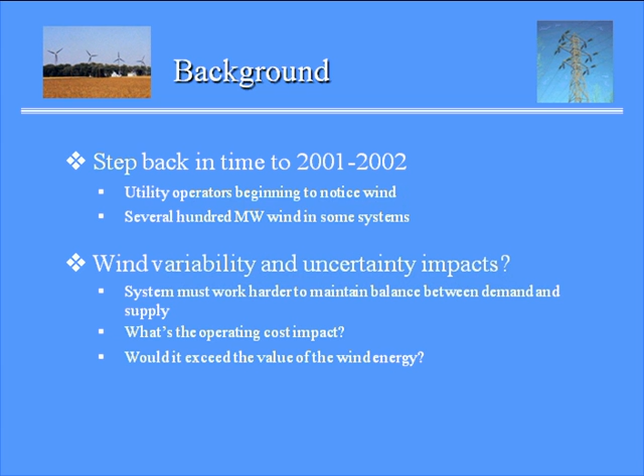Wind wasn't really under their control, it was under the control of Mother Nature. So the operators began to be concerned about the variability and uncertainty of wind and what would be the impacts on the rest of the utility system, because the system has to be kept in balance between demand and generation at all times, and this balancing job becomes harder with a power generation technology like wind that's moving up and down. So there would be an impact on the cost of operating the rest of the power system, and utility operators were getting concerned about that. In fact, there was a fear that the impact on operating costs would actually wipe out the value of the wind energy itself. So that was a serious concern.

in asking this question: what would the integration costs be? So Xcel, Northern States Power, partnered in that era with the Utility Wind Integration Group, and along with a number of other interested folks, carried out a highly credible study of the wind integration costs using models and techniques well respected within the power business. At the time, NSP, Northern States Power, had about 3% of their energy coming from wind, so they studied that, and found that the integration cost was not zero, but it was also not a huge number. It turned out to be about a little under $2 a megawatt hour, or 0.2 cents per kilowatt hour of wind energy, which was well under 10% of the wholesale value of that wind. So UWIG published a report about that, and also EPRI, the Electric Power Research Institute, who was a co-sponsor, also published that report under their cover. So that result was received with a fair degree of credibility.

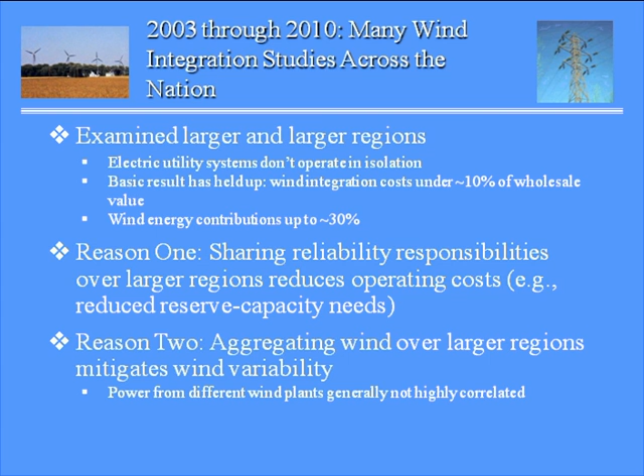A year later, the Xcel people looked at a higher penetration. They looked at 10% penetration, and found a higher integration cost, a little under $5 a megawatt hour, and that was not a surprise. That was to be expected.

Then 2 years later, a study was conducted for the whole state of Minnesota. So instead of just Northern States Power, there were now 4 major utilities, 4 so-called balancing areas considered. And the penetrations of 15 and 25% were looked at, and the remarkable result was that even at 25%, the total integration cost turned out to be less, that $4.41 number, less than the 10% number for Xcel by itself, which was $4.60. And so what you're seeing again is these 2 points that I mentioned on the previous slide, and that is that as you go to larger and larger balancing areas, it becomes easier to integrate the wind and deal with its variability.

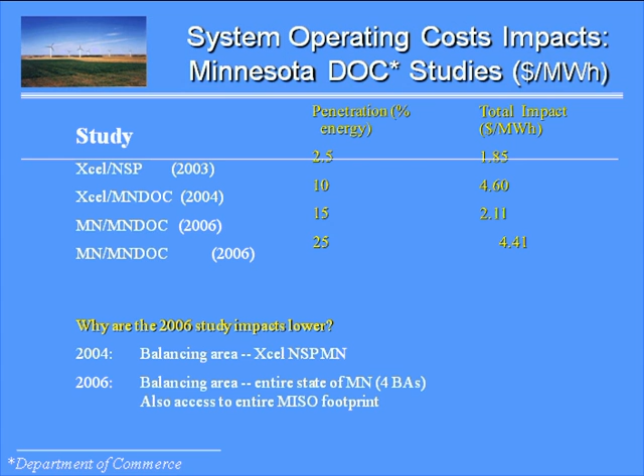So what's happening with Xcel Energy today? They've got 2 major operating areas, a lot of wind in them. One's in Minnesota, one's in Colorado. And in both of those regions, they are now approaching and actually exceeding 10% of retail energy coming from wind. So what's happening is that they're now revising their generation expansion plans, largely in recognition of environmental concerns, the need to go to lower carbon generation, et cetera. And although they previously had planned to add coal plants, they're now changing those plans with the approval of their Public Utility Commission and replacing those plans with a combination of wind and gas.

Now, wind, as I've said, is not an ideal resource in that it is not totally controlled by the utilities, but on the other hand, these folks who operate the systems are learning through experience how to deal with the natural characteristics of wind.

Now, on the other hand, there are a group of folks around the country, a group of skeptics that are tending to fight this trend toward wind growth. And they've made a number of assertions. They will say that wind doesn't work, it just doesn't really displace fossil fuels, and it doesn't really reduce greenhouse gas emissions, and it just costs too much anyway.

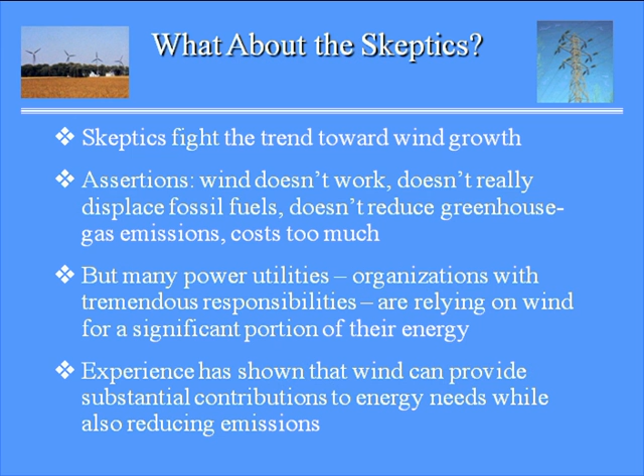Before we turn over to Michael, I wanted to clarify one thing. Many of our listeners may not be in the power industry, people in communities where wind projects are proposed, not used to hearing units expressed in dollars per megawatt hour. Most people are used to looking at their electric bills and thinking of electricity costs in cents per kilowatt hour. So I wanted to connect the dots here: when Ed or Michael talk about numbers like $2 to $4 per megawatt hour, that corresponds to 0.2 to 0.4 cents per kilowatt hour, or less—on the order of a quarter of a cent per kilowatt hour—when electricity rates in the New England area are going to be in the teens of cents per kilowatt hour.

As Ed pointed out, there are a number of valid concerns and questions that the people who operate the electricity systems throughout the country have been asking. What will wind do to the system? How does wind impact reliability? What are the impacts and the costs? And what additional needs does the system have in backup capacity and operating reserves?

And ultimately, does wind power cause the offsetting of fossil fuels and emissions, as wind proponents have claimed, and what can be done to integrate larger amounts of wind?

Michael Milligan is part of the Transmission and Grid Integration Team at the National Renewable Energy Laboratory. Michael has authored more than 120 papers and book chapters and served on numerous technical review committees for integration studies. He is co-lead for the Probabilistic Methods team of the NERC North American Reliability Council Variable Generation Task Force, a member of the Western Electricity Coordinating Council's Variable Generation Subcommittee, the International Energy Agency's Task 25 on large-scale wind integration, and served on the Western Governors Association Clean and Diverse Energy Wind Task Force.

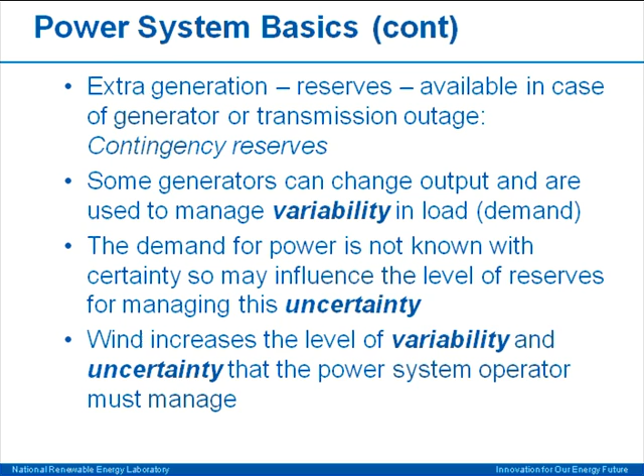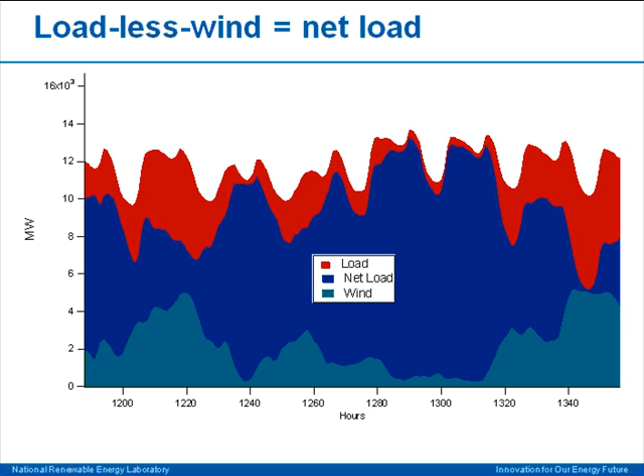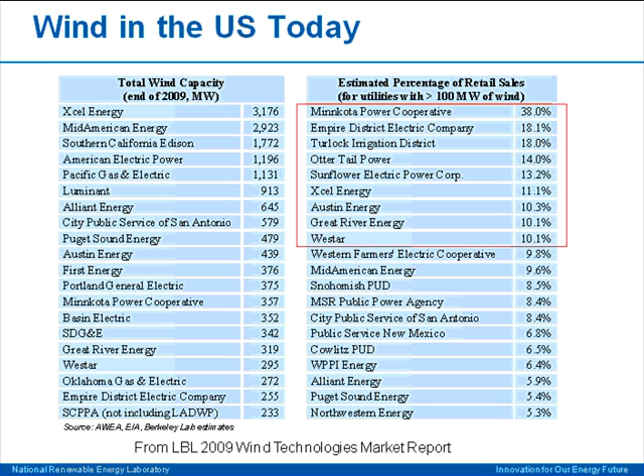Today we have wind in many areas around the United States. I outlined some areas that have more than 10% electricity coming from wind. You see Xcel Energy roughly in the middle, a little below middle at about 11%. This is from the Lawrence Berkeley Laboratory's 2009 Wind Technologies Market Report. It's a very good survey, and I recommend it if you're looking for interesting reading about wind and its impact in the markets.

This is an example of an actual utility. It's not modeled, not simulated - this is an actual week. This utility has an instantaneous penetration of wind of 35% of the peak. If you look carefully at the graph, you'll see the maximum wind output occurring at a time when the load is low. This is not uncommon. It's not what you hope for, but in this case, in the middle of the night, electric demand is fairly low while the wind is pretty high.

This graph shows that challenge. This utility is able to manage it - they have some flexible generation that allows them to manage that wind. Of course, this slide doesn't really address the issue of certainty or uncertainty. You'd certainly like to know when this high wind is coming so you can position the rest of your generation to manage it.

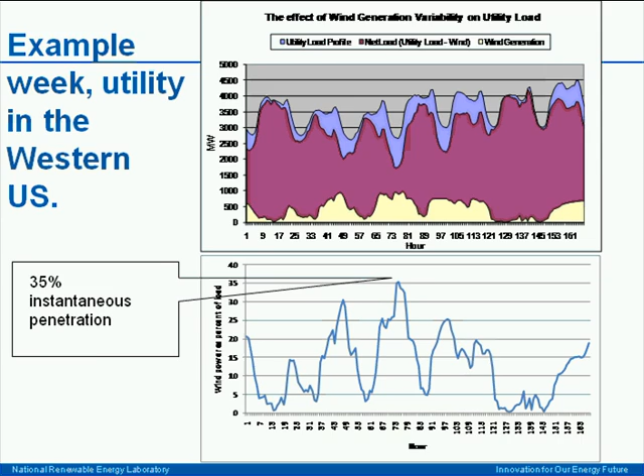So let me talk for a minute about integration studies - what they are and what they look at. These are very detailed power system studies. They involve some combination of simulating the operation of the power system, and Bill will talk a little more about that for the New England study.

What you want to do is represent the power system as accurately as you can, so you get actual data for the performance of the power plants you already have - what type of fuel they use, their operating characteristics, how long it takes to start them up. I mentioned the unit commitment process. For large thermal plants operating with coal as fuel, it takes many hours, and in some cases up to a day or two, to get those units up to operating temperature so you can run them.

So this whole idea of unit commitment is important, and we need to make sure we fold that into the wind integration study. If a plant takes a day or six hours or whatever to start up, we want to make sure the simulation knows about that. So we have lots of detailed data from the existing power system, including transmission loading limits, whatever we have available and appropriate for the study.

What you'd really like to do is utilize actual wind data, but we're trying to study the impact of future wind plants that don't yet exist, so there's no actual data. In lieu of that, we typically utilize data from large-scale numerical weather prediction models used to recreate the weather. Those models are essentially the foundation of weather forecasts in the U.S. and around the world, and they allow you to extract things like wind speed at any time and space you want. I've got another slide I'll show later on how that's done, but essentially we get detailed wind data representing the future wind build-out.

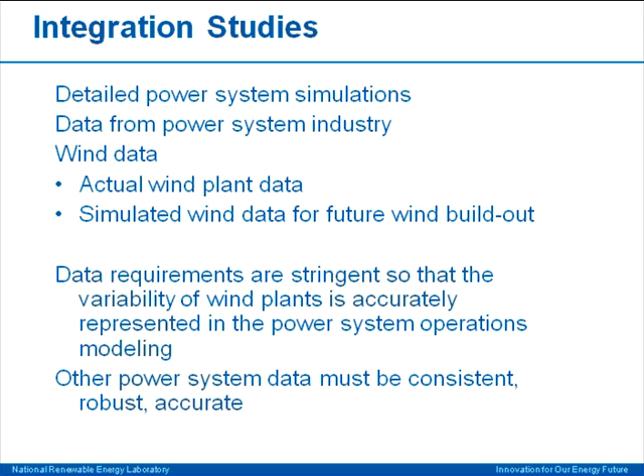This slide is based on our large-scale data set developed for the Western Wind and Solar Integration Study. You can see this on NREL's website. What this shows is that we model the weather around the region of interest, in this case the western part of the United States. Because this is based on a numerical weather prediction model, we can recreate the wind speed at any time and space.

This map shows different capacity factors of wind in different areas. The red blotches represent some very energetic wind resources. As you move toward the cooler colors, these tend to be lower capacity factor wind plants, so their energy yield per unit of capacity is less as the capacity factor goes down.

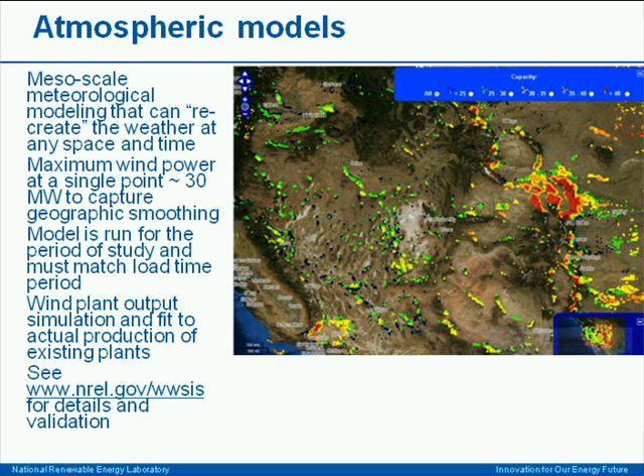For the Western study and also for the Eastern study, we have a large variation in the performance of the wind plants we're simulating. We've got a consistent weather model driving all the wind, so the wind we're feeding into the power production model is a pretty good simulation, and it does take into account the different wind speeds at different times and locations across the footprint.

The integration study results, as Ed alluded to, show that we can integrate wind into power systems reliably and economically. In some cases there may need to be operational changes, and in cases where operational changes would be needed to incorporate large amounts of wind, those changes would actually be beneficial even if there were no wind at all.

Ed mentioned larger balancing areas. We've seen consolidation of balancing areas and reserve sharing groups across the U.S. for decades, and that was driven not by wind, but by the fact that there are many economies of scale and reliability benefits you get from larger operating footprints. Both of the integration studies have a rigorous technical review process.

The technical review committees typically come from various aspects of the power system industry, with folks having various subject matter knowledge. The Utility Wind Integration Group is essentially an industry group trying to better understand the issues behind wind integration, primarily power system focused. I believe all of the independent system operators and regional transmission organizations in the United States are members of UWIG, along with many utilities. If you're interested in following other integration study results, I recommend UWIG.org as a website. Go to the Wind Integration Library, and there's plenty of information on these studies.

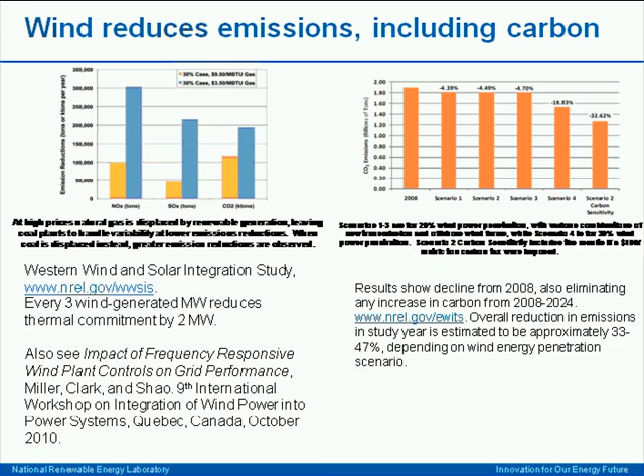The North American Electric Reliability Corporation, the reliability organization for the United States, has a number of working groups looking at wind integration. It's not so much a question of if we can integrate, it's a question of how we do it. That work is ongoing, with a number of reports in process. A couple of reports have been approved by NERC that show some of the things we need to think about as we move towards a higher wind future.

The frequently asked questions I'd like to talk about came from an article I did not choose the title for, Wind Myths Debunked. This was in a recent Power and Energy magazine, a publication of the IEEE Power and Energy Society. We had a number of co-authors, including Ed DeMeo, and folks from literally around the world. Many, like Hannele Holttinen from Finland, who chairs the International Energy Agency Task 25 on large-scale wind integration. We also had various consultants and folks from GE Energy, University College Dublin, and Sweden.

What we did in this article was take a look at questions that we've seen people ask from around the world, and we focused on these and attempted to answer them in as simple a way as we could.

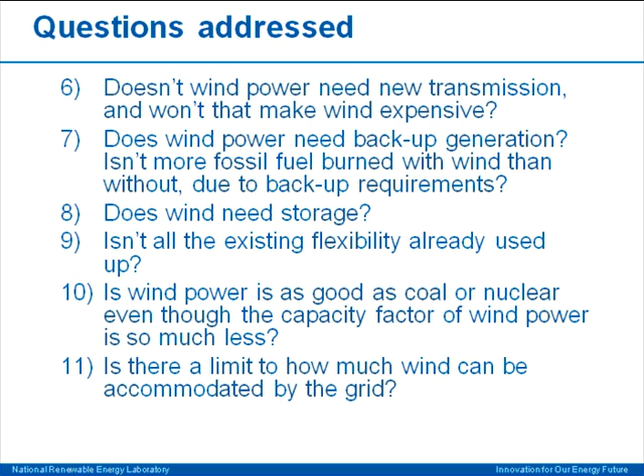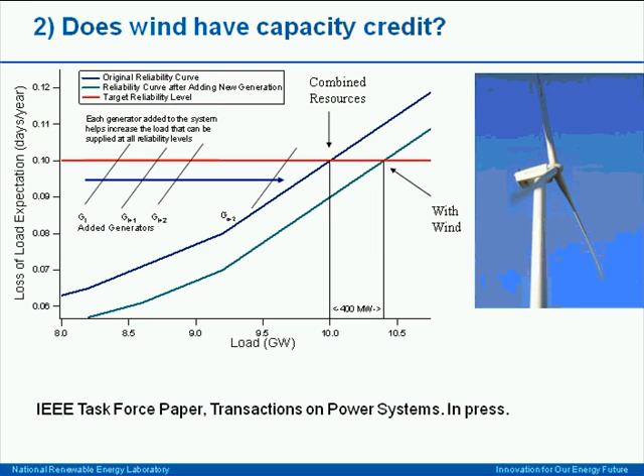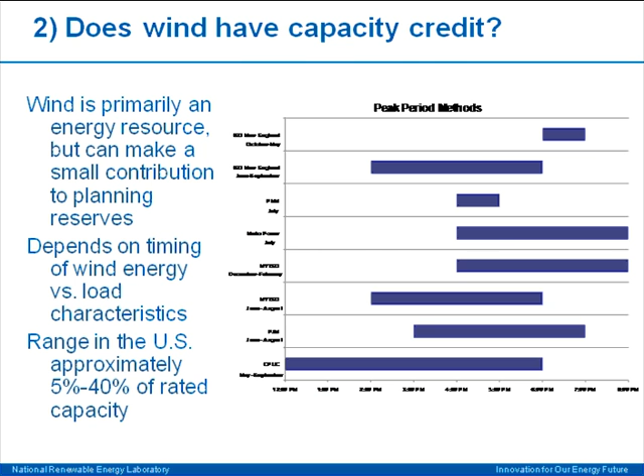I'm going to skip through this slide. This basically just shows that there are a number of entities around the United States that use non-reliability-based metrics. These are essentially approximation methods. If you're interested, I can give you more citations on what this means.

The next slide: how often does the wind stop blowing everywhere at the same time? This is actually an event that occurred in Texas a couple of years ago, February of 2007. What happened was there was a very, very large dust storm that moved through Texas. In the bottom picture, this is actually a satellite image we got from WindLogics, and you see the little yellow highlight that shows the dust. So this is telling us this is a pretty big storm, it was visible from the satellite, you could see the dust swirling around.

What happens is that wind turbines are built and designed so that they protect themselves when the wind is too high. So the wind turbine will shut off, somewhere around 50 miles an hour, but it depends on the wind turbine.

This particular storm moved through Texas, and as you can see in the right-hand upper graph, there was a decline in wind output. In the upper left-hand part of the graph, it's a little hard to make out, but we have traces for many of the wind plants, and in some cases they dropped off pretty quickly.

You can see the red trace where there's about a 170 megawatt decline in wind over a 15-minute period. So that's obviously cause for concern. But in aggregate, when you take a look at all the wind plants across Texas, there's about a 1,500 megawatt drop over a 2-hour period.

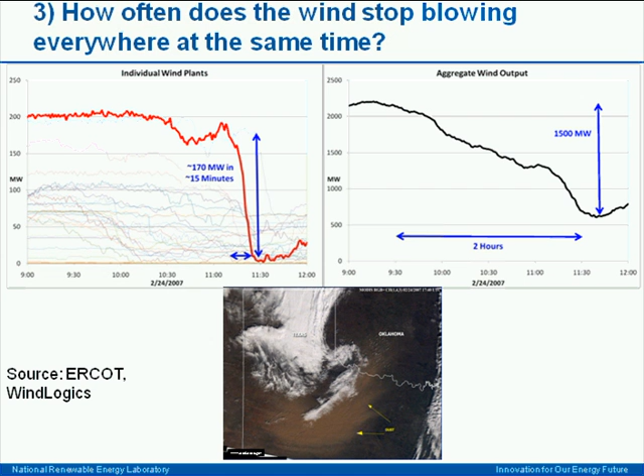And there was another event in Texas that had kind of a similar result.

I'm going to pick up the pace a little bit. I've got a lot of slides to cover, and I know we want to hear from Bill Henson and have some Q&A time.

But kind of the upshot for this slide is that, yes, we can predict wind power. It's harder to predict day ahead than it is hour ahead. But we'll never be able to produce or forecast it perfectly. The relative forecast errors decline for large footprints in the same way that wind variability declines per unit over large footprints.

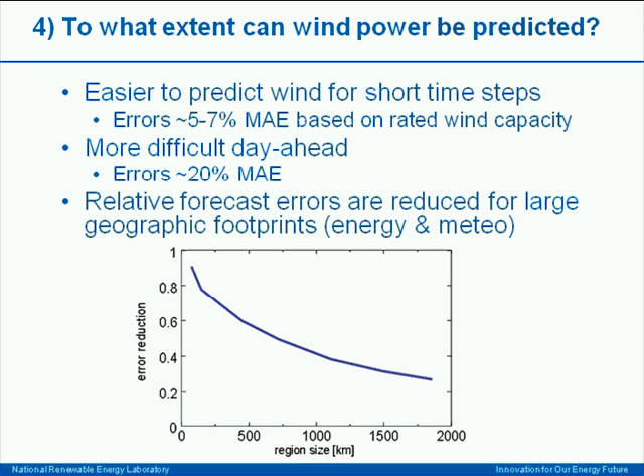Ed talked about some of the integration studies. This is another summary of a few additional integration studies. I caution you, if you're comparing these closely, many of these studies utilize different methods to calculate wind integration cost, and many of them have different penetration rates. But if you take a look at the range of integration costs, it's relatively low.

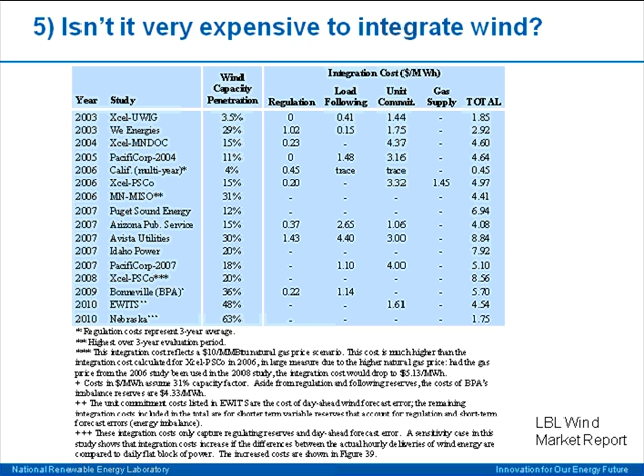If you ask why it costs more to integrate wind, the primary cost really comes from additional operating reserve. Now that doesn't mean you have to go out and build new generation when you put in wind. It means the generation you have needs to be operated differently. It's going to be moving around, ramping, you're going to be turning it down, you've got some efficiency losses, and so there is a cost impact of all that.

When people talk about additional reserves for wind, we're not talking about a constant level of backup that's available 8,760 hours of the year. There's a recognition that sometimes you're not getting any wind energy. If you're not getting any wind energy from your wind turbines, then clearly you don't need to worry about backing up the wind—it's already at zero, and you're running the rest of your generation fleet to meet the load accordingly.

The variability of wind does combine with the variability of load. There's very little correlation, and that's good and bad. It's bad because you'd like perfect correlation, wind going up every time the load goes up, but unfortunately that doesn't happen—wind sometimes goes up when load goes up, and sometimes goes down when load goes up. The good news is that the variabilities combine, so you don't need to back up wind one for one. We don't actually back up any generation in the system one for one because it's too expensive.

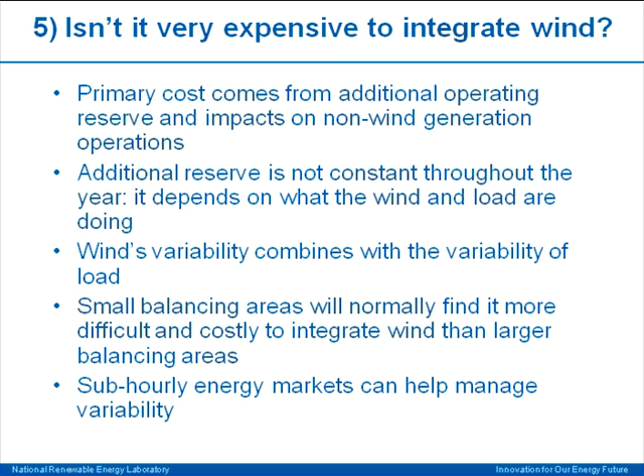We also find that sub-hourly energy markets help tremendously in managing the variability. Now, the sub-hourly energy market does not magically reduce the variability that you have on the system, but what it does is allow you greater access to the flexibility that you do have on the power system. So we see that as a very big factor in integrating wind.

Don't you need new transmission for wind, and doesn't that make wind expensive? Well, you generally need transmission for most new generation sources.

You may need more for wind if you're bringing remote wind to a load center, and certainly transmission does have a cost. Some work by the Midwest Independent System Operator and other regional transmission organizations in the East found a benefit-cost ratio of 1.7 to 1 for transmission that would support a 20% wind energy penetration. Transmission tends to be a pretty low percentage of overall power costs.

So yeah, there's a cost to transmission. I don't want to totally gloss over it, but like anything else, you need to do a detailed cost-benefit analysis to figure out if this particular transmission has value that exceeds its cost. If so, we should build it. If its cost exceeds its value, we should not build it.

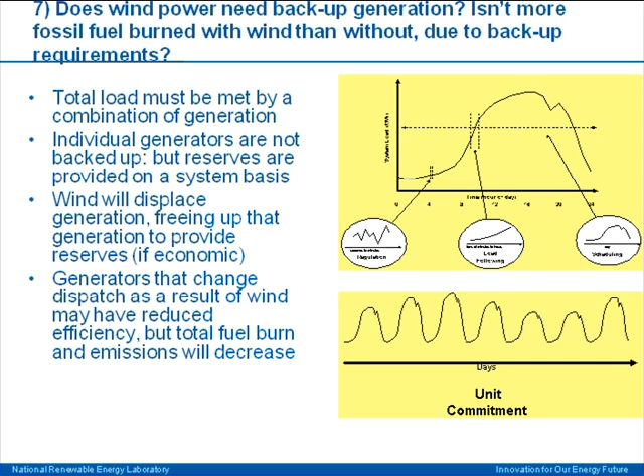Are you burning more fuel? Yeah, that one driver may be, but the other two drivers are actually leaving their cars at home. That's what we find with wind. It turns out that in the Western study, what we found is that for every 3 megawatt hours of wind, you could avoid committing about 2 megawatts of conventional generation. When we say avoid committing, we mean you shut it off — it isn't spinning, it isn't burning fuel, it's sleeping because you don't need it. And of course you can do that if you have a reasonably good wind energy forecast.

Another common question we get: well, if you're going to put in all this wind, don't you need some sort of storage? It could be pump storage, it could be a big battery. We don't find that. What we do find is that storage always has value.

We've been building storage in the U.S. We haven't built so much in recent years, but back in the 60s and 70s we had a lot of big coal units coming online. We had a lot of big nuclear units coming online, and it was decided at the time that you can't really move those nukes and those big coal plants around.

Wouldn't it be nice to pump water up the hill during the night when you don't really need all that energy, and then the next day you let the water come down and turn a turbine? Certainly there's a lot of value to that.

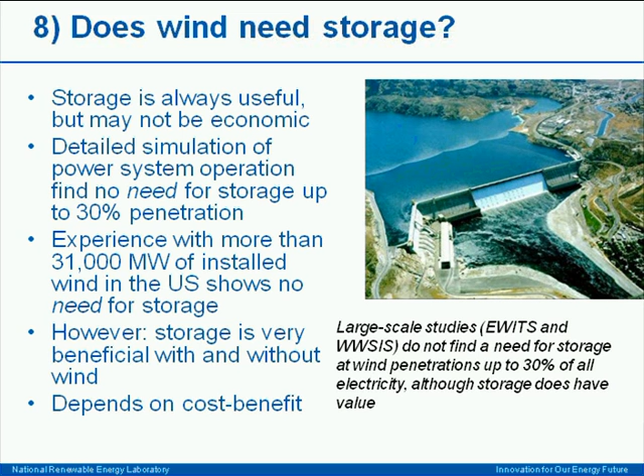But when you take a look at the detailed operational analysis for existing wind plants as well as integration studies, we don't find a need for storage. We find that if you have storage, you're going to use it, and that's a great thing. We love storage, but it's going to be pretty difficult to justify storage on a cost-benefit basis at today's storage prices. We can also think about storage in terms of fuels. If I've got natural gas, if I don't burn the gas, I can store that gas in the ground. That's another form of storage, which we do take advantage of.

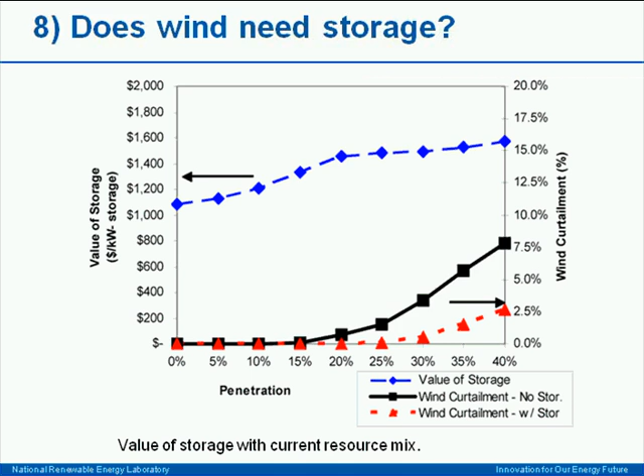In the interest of time, I'm going to skip through these two slides. They're actually very nice slides, you can read them in the Power and Energy magazine. They basically show the value of storage tends to decline if you have more flexible generation.

What about all the flexibility? As we've seen, and as we see in this graph, load requires a lot of flexibility already. We've designed the system to be able to manage the load.

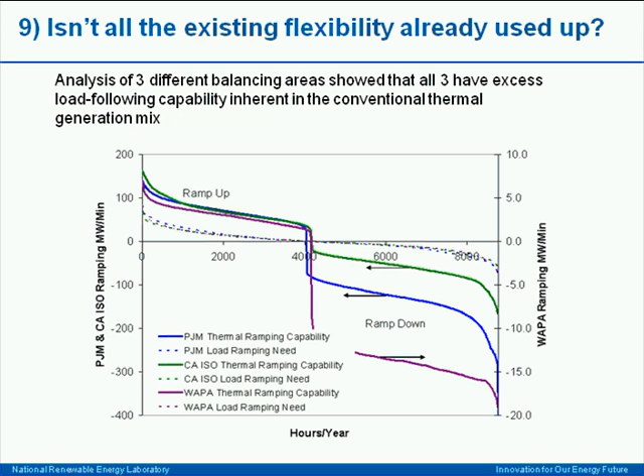We did some work here at NREL a number of years ago taking a look at this question: is there existing flexibility in the generation fleet that is not being used? And the answer is yes, there's quite a lot. I won't drag you through all the great details of this slide, but we found a tremendous amount of flexibility that exists, and in some cases there are no energy markets that allow you access to that flexibility, and that turns out to be a pretty important issue.

So we think that you can get additional flexibility from your hardware, from new combustion turbines, reciprocating engines, hydro, for example, but we also need to ensure that we have institutional flexibility. If you have all this really nice generation that can respond quickly to commands to increase or decrease output, and yet you don't have any institutional framework that allows the system operator to say 'I need more out of this plant,' then we've got a problem. So we've identified a number of institutional benefits so that we can take advantage of the flexibility that physically exists in the system.

Demand response has promise. It's hard to know exactly how much demand response there might be. How often can you call upon it? What's its price? People have talked about plug-in hybrid vehicles in the future. We think that has a lot of potential, but we don't know exactly how much potential.

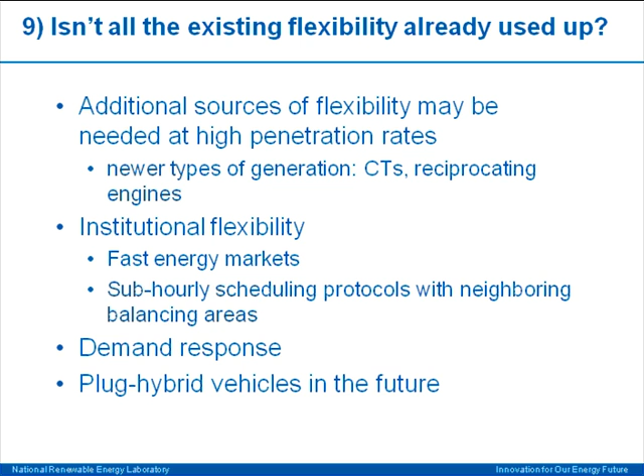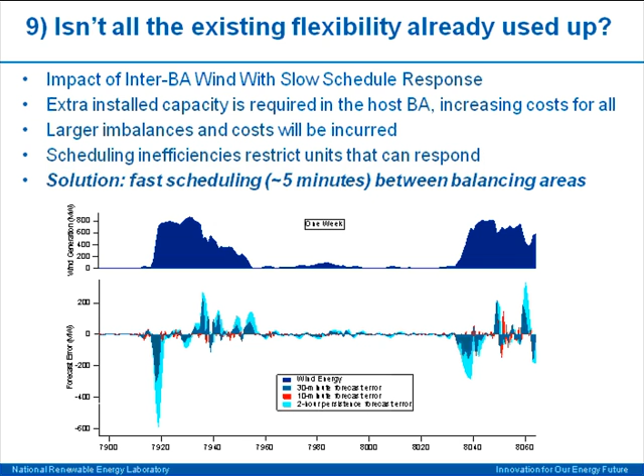One of the other things we've looked at in some detail is scheduling rules between balancing areas. Without dragging you through the details of this slide, if you look down towards the bottom, this is data from Bonneville that they have on their website. We did some analysis, and the turquoise you see represents the swings in capacity that Bonneville has to provide today as they deliver wind from their balancing area to outside their balancing area. If Bonneville were to change scheduling practice so that they don't just change once an hour, but change every 5 minutes, the little red line you can barely discern here represents the swings in the hydro that Bonneville would need to do — much, much, much less than what's currently required with hourly scheduling.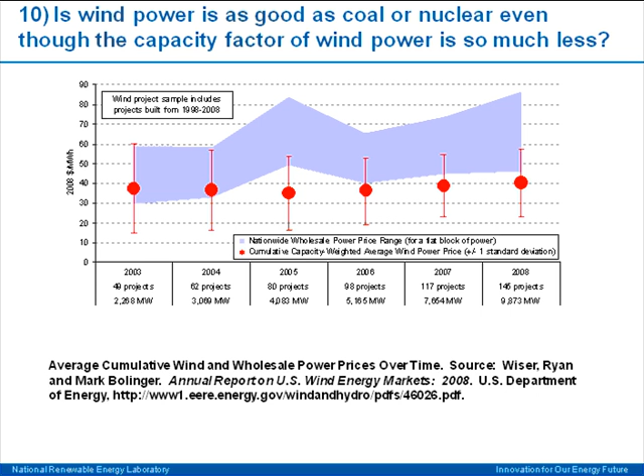Is wind as good as coal or nuclear? This report by Lawrence Berkeley, and there is an updated version of this — I wasn't able to get the slides for it in time for this webinar — shows that the power purchase price for wind is competitive with other power plants, depending on the region you're looking at and the year the plant was built. And then if we go on and take a look at the capacity factors of wind compared to other generation sources, as a reminder on the right, we see that the load varies quite a lot from daytime to nighttime.

And so we've built up our generation fleet so that we have nuclear units, coal units, for example, that have pretty high capacity factors. You look at other steam turbines and you say, well, they're starting to decline, about 55%. You get to wind, and this is from the Midwest a couple of years ago, capacity factor of wind is 30%, which is actually a little bit higher even than the hydro capacity factor.

We also have plants that we've basically built to provide peak energy, so you can see some of the combined cycle, the gas steam turbines, and so forth. You can pick your favorite here, out to the right, that have capacity factors in the 10% or even less range. Does that mean they're less important or that we don't need them? Not really. We need all these plants because they work in concert together to provide the variability that we need to be able to provide for in the electric load.

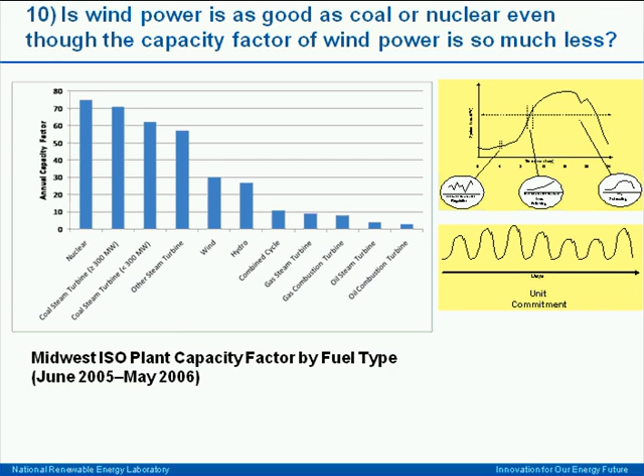What about limits? There's some maximum amount of wind that we can accommodate. In the work that's been done so far, we can manage up to 30% energy penetration. That's easier in the east than in the west because the eastern part of the U.S. generally has more flexibility in terms of markets, generally has larger operating footprints, and both of those things make it much easier to integrate wind.

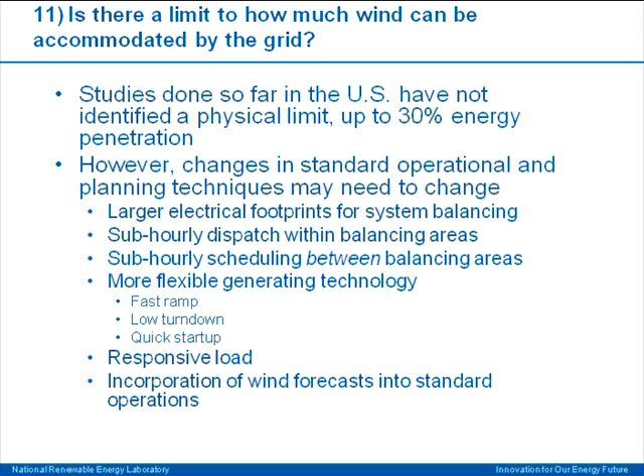In the west, there are more challenges. I know the focus of this webinar isn't the west, but if you have a lot of small balancing areas, as we have in the west, it's a much more difficult task. There may be some changes needed in operational procedures and planning methods. Larger electrical footprints help. Sub-hourly dispatching within balancing areas helps a lot, and scheduling between balancing areas sub-hourly helps a lot. Notice a lot of these are really institutional issues as opposed to technical issues. There's some other ways we can get flexibility, either institutionally or in other ways.

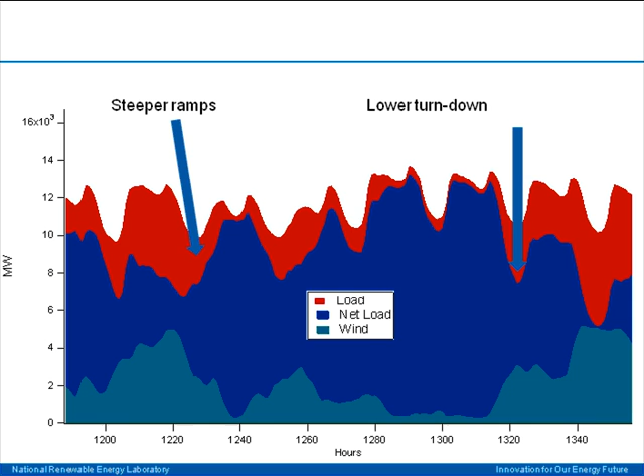I'm going to wrap up here real quickly. We saw this graph earlier. With wind, you've got steeper ramps that you have to manage. You've got lower turndowns, and you have to be able to manage those with more flexible units. We've seen some high penetration rates, and we can manage them. So let me summarize: wind does bring in additional variability and uncertainty. We do know a lot about how we can manage this, and there's a lot of work going on to try to figure this out a little bit better. So with that, I'll turn things back over to Bob.

Michael, thank you very much. A lot of good information there. We're going to now go from the general to the specific. Bill Henson will talk about the perspective for New England in particular.

Just a note on perspective here. Even wind's staunchest advocates hear the question, why bear the impact associated with wind for a benefit that's not meaningful? People might cite statistics like wind is only 1% of the mix and will always be a trivial contributor. But even wind's staunchest advocates aren't claiming that wind will provide 100%, but rather that wind can someday contribute a material proportion to the portfolio, 10 to 25%, somewhere on the order of other major energy sources.

In advance of this webinar, I took a look at the mix of resources over the last 12 months of data available for New England. We had 37% of the mix supplied by natural gas, 30% from nuclear, 12.5% from coal, 8% from hydro, about 5% from oil, and wind today ranks about the 10th contributor.

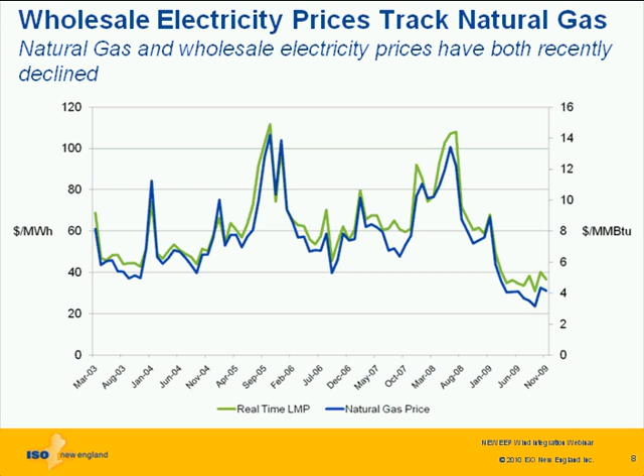This is also what Bob was sort of speaking about. There's quite a bit of wind resources in our interconnection queue. Right now, we don't really have that much in the way of wind generation currently operating in ISO New England, maybe 250 or so megawatts. But that number could grow substantially over the next few years. So this is one of the drivers for why we did the New England Wind Integration Study, to try and make sure there wouldn't be any insurmountable operational difficulties associated with integrating large-scale wind into New England.

In 2009, the New England governors asked ISO New England for technical assistance in developing their long-term renewable energy vision. As part of that, several scenarios were studied, and some transmission was sort of crayoned in, basically based on maps of where the wind potential is in New England.

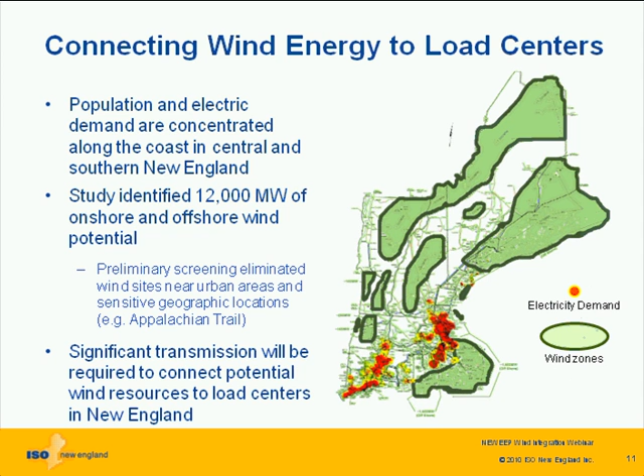So we needed a New England focused analysis, because the impacts of wind on the system vary with the resources that are on the system, and they vary with the characteristics of the wind in the region. So we started this New England Wind Integration Study, and it's a comprehensive study meant to highlight the operational effects. We wanted to make sure, as I said, that there were no insurmountable operational difficulties that we'd see. We're not quite done with it yet, so today I'm going to share some details of the study we've put together, and also some near-final results.

As I think Michael mentioned, the wind data that we used in this study was developed through a large-scale numerical weather prediction type model, very similar actually to the data that was developed for the Eastern Wind Integration and Transmission Study. Very similar. We did some additional validation, maybe some additional siting criteria.

And we also developed a wind data set for the entire New England wind resource area, which would encompass from New England up even into New Brunswick and the Maritimes, and certainly down the coast.

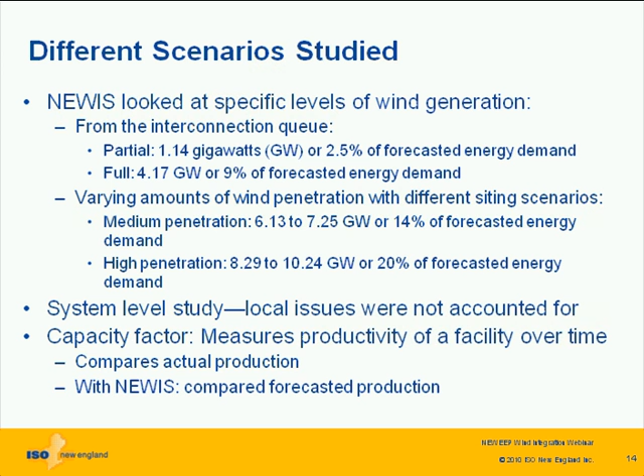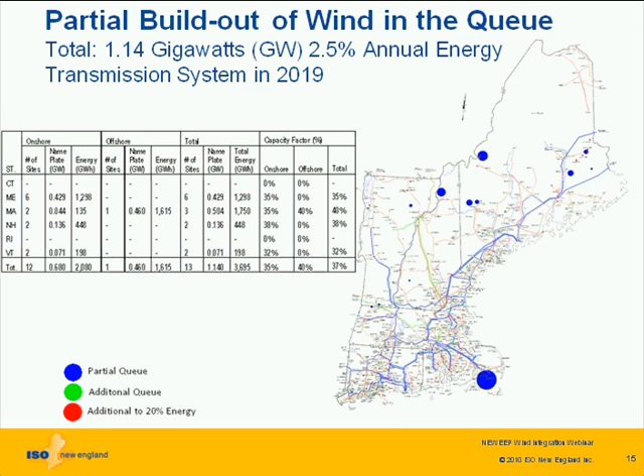The legend over here on the right side, you'll see these colors repeated in the next few slides. We wanted to show that these additional sites are added on top of the sites that are already in the queue. So the transmission system we used for this particular wind scenario is the existing system in 2019 or thereabouts.

You can see that we've added some transmission in this next slide, and this is a transmission configuration that we adapted from the governor's study that I mentioned earlier. You can see some new blue lines and a new pink line there. The blue lines, I believe, are 115 kilovolt transmission, might be 345.

But on the surface of it, it doesn't look like there's a lot of transmission there. But actually, this is a substantial build out of transmission. The main purpose of it is to go and get this wind that's sited up here in northern Maine.

Again, the table with the capacity factors, and there's a fleet overall capacity factor there of 34%. The blue sites, as I mentioned earlier, are those in the partial queue. The green sites here and here up in northern Maine are the ones that are in the additional full queue.

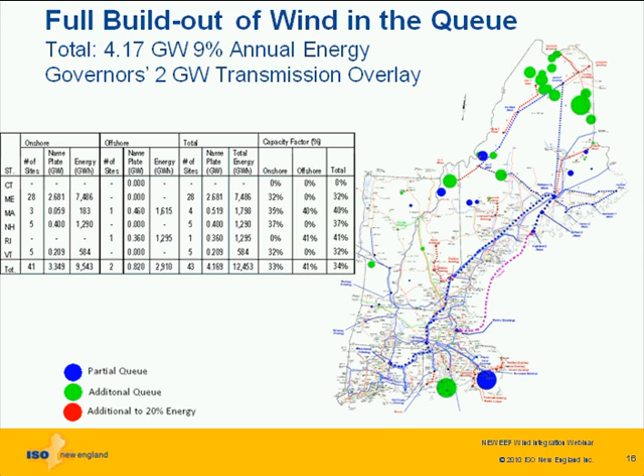So the next of the additional scenarios we looked at was what if, instead of being scattered out through the best onshore locations, it was all located where the best offshore wind resources were, again by capacity factor. And that turns out to be all southeast of Nantucket, I suppose, and near Massachusetts there.

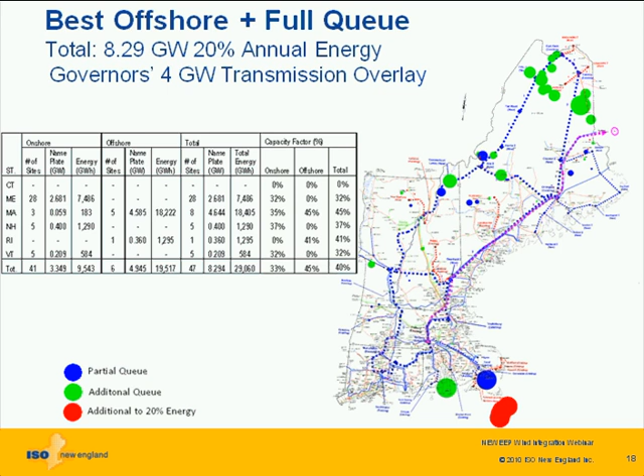So here's another one of the siting scenarios that we looked at. What if the offshore was spread out between the 3 states of Maine, Massachusetts, and Rhode Island, the additional sites to bring us to 20% energy, and then adding also the best capacity factor sites from onshore.

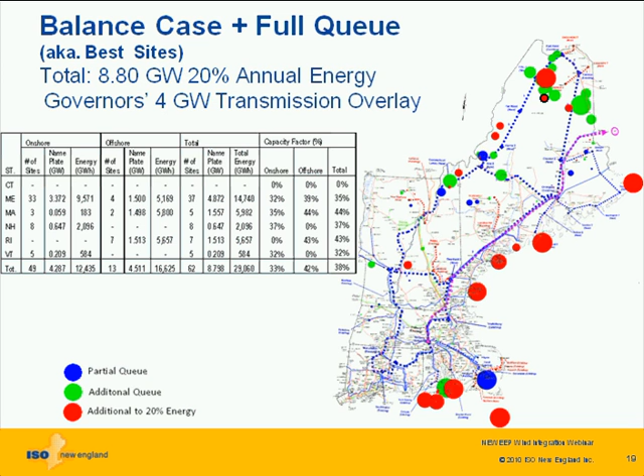That's the last of the siting scenarios that I'll show you in the main presentation, but we looked at a few other ones as well that you can look at in the bonus slides that I have included.

So capacity value. Michael, I think, talked some about capacity value, and the next chart is going to show you the capacity values using the loss of load probability analysis technique that we used. As Michael mentioned, it's an industry standard way of quantifying the reliability contribution of a generation resource to meeting the needs of the system.

Also, this is something that's been found in other studies besides this one: offshore wind has a tendency to correlate better with the load pattern, so the capacity value of the scenarios that have a good deal of offshore wind is a little bit higher. And so the chart indicates what the amount of offshore is.

Say, for instance, in the best onshore case here, you can see that only 8% of the nameplate capacity of the fleet was offshore. And as expected, as the offshore amount rises, the capacity contribution, the capacity value, also rises as well.

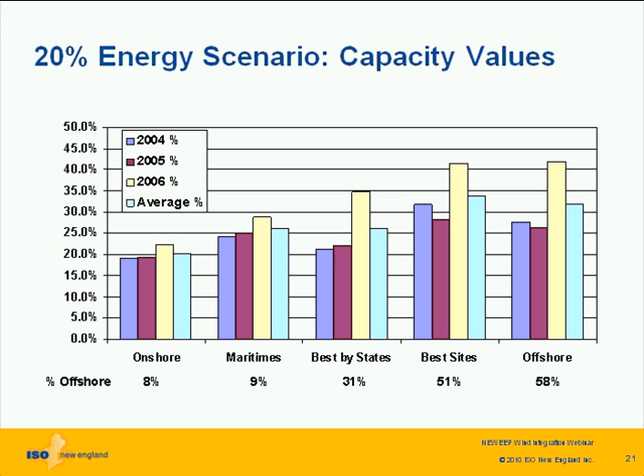The light blue, aqua bars are the average over the three years that we looked at. You can see that the capacity value using the ELCC, or the loss of load probability technique, ranges somewhere between 20% and, in a good year, say 42% or so. That's a significant bonus to have an energy resource provide capacity as well.

The next four slides that I'm going to show you are a little bit of eye charts, and I apologize for that. These are charts that I went through as I was trying to make sure that the simulations we were doing were as accurate as possible, but I thought they might be illustrative.

So the output of each generation resource is stacked on top of each other, and the interesting thing about these plots is it's best to have the least variable resources on the bottom, because the width of the slice on the graph shows the amount of energy that's being produced. You'll see that the nuclear units' outputs are quite flat, and the combined cycle units change their output quite a bit.

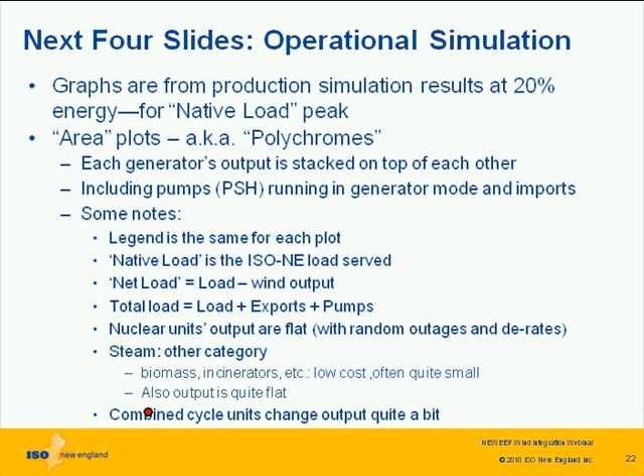So this is a peak load, the peak load over the time frame that we looked at, and this is the result with no wind. Here again, the nuclear units are down at the bottom, and the more variable units are riding on top of them to meet the system load. The system load here is the pink line at the very top.

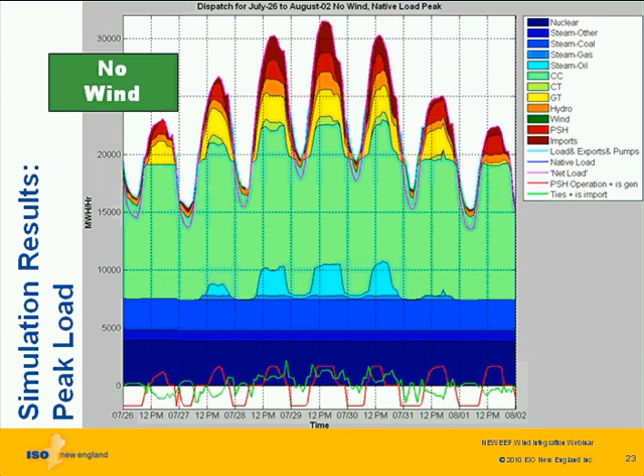If you add significant amounts of wind, you reduce the amount that the peaking capacity is being run here. So the steam oil and steam gas units are operated less during this peak time. The same thing happens with significant offshore wind, although it matches the load peak a little better here, so again it reduces the peaking conventional capacity to some degree.

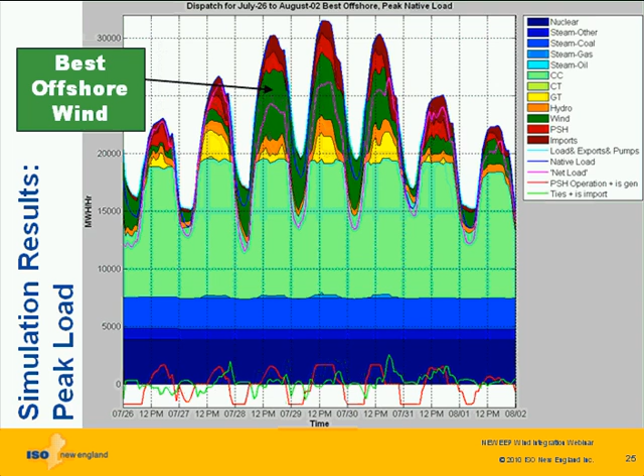And here's an even worse eye chart. This is an interesting week, and I wanted to include it because not only did we see great effects from wind, but we also saw effects that would cause us more difficulties, in that, in this instance, wind increases the amount of ramp our system would have to be capable of dealing with, the amount of load-following ramp.

So in the middle of the night, when the load is very low, the wind is quite high, that's this yellow here. The load is quite low. As the load grows to a high amount, the wind drops off in this particular instance, and then as the load falls off again, the wind comes back up again. So this would have been a very interesting week.

This is an overall result of one of the years that we studied. You can see that for annual energy by fuel type, wind displaces mostly combined cycle natural gas, but also, though it's very difficult to see, steam oil and steam gas are reduced to some degree. This chart shows it by penetration scenario as well.

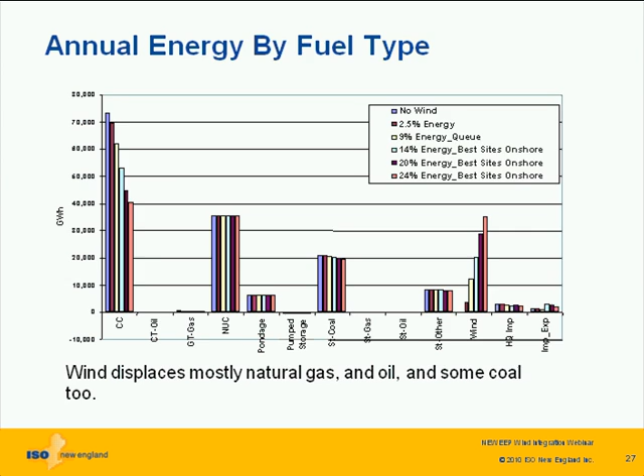As Michael talked about, the emissions do go down. We used a pretty high fidelity model here, where we modeled heat rates that would change with the generator's output level, and so as we add wind, the emissions do decrease for the entire system.

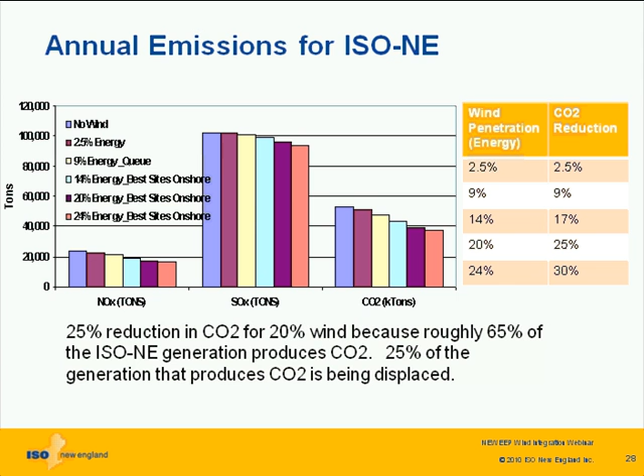For CO2, you can see in the chart here, and also over here on the right, that it's not quite one for one. As you get more wind, you get a little more benefit for CO2 reduction, and that's because as you get higher penetrations of wind, you tend to displace not just natural gas, but also coal, which produces more CO2.

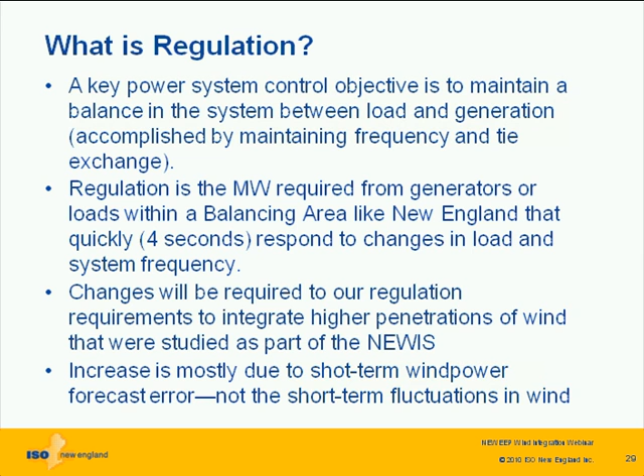Just a few more slides to go. One of the things both Michael and Ed talked about was regulation. Regulation is the fine-tuned control we use to make sure the power system balance is maintained. One of the things we observed was that changes will be required to our regulation capacity requirements, and that the increase is mostly due to short-term wind power forecast error, not necessarily the fluctuations themselves. It's more due to the uncertainty.

These again, as I've said before, are preliminary results. But as you can see, there's what looks to be a linear relation between the amount of wind, the wind penetration down here on the bottom, and the regulation requirement here on the left. We took two different estimates of it because we wanted to have a high and a low.

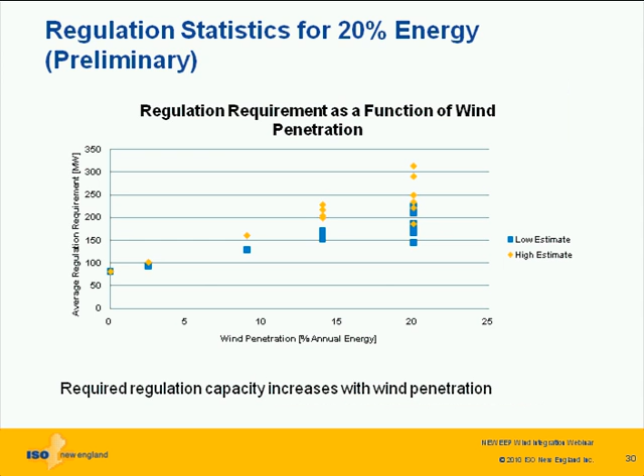The reserves are sort of, as Michael also mentioned, our insurance policy. It's meant to protect against credible contingencies, things like generators that might go offline or transmission lines that might have a fault. We use several types of reserves here in New England, and because of our imperfect ability to forecast wind, we will also need increased reserves.

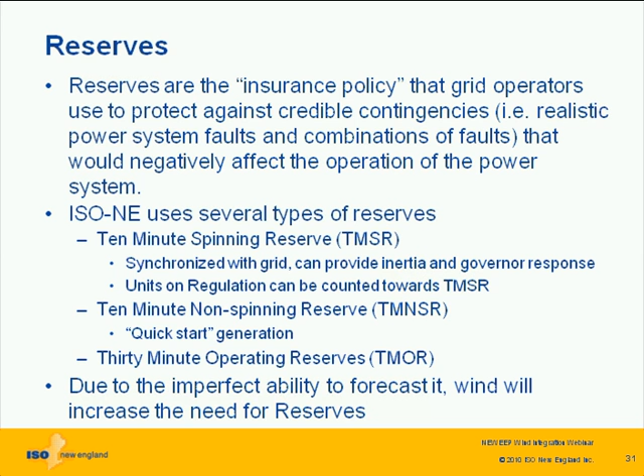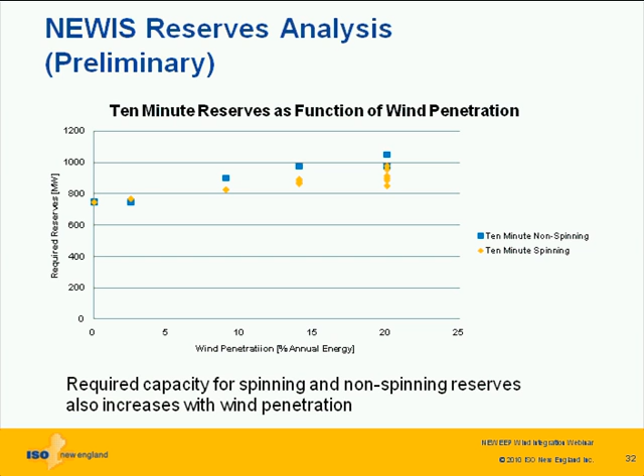This slide shows in a similar fashion the preliminary results we have with increases in reserve requirements. So if you trace over here, say for no wind on the system, our average 10-minute spinning reserve requirement is about 700 or so megawatts in any given hour. And as you increase the penetration of wind, even in the 20% scenarios, the requirement goes up to somewhere around 1,100 or so megawatts of required reserves.

So these are, this is my final slide with the overall observations we have so far. As I said, we're not quite done yet. We will be presenting more expansive results to our New England stakeholders at the forum, the Planning Advisory Committee.

The capacity factors, as I've shown, are quite good, but they do diminish with increasing penetration. Sorry, the capacity values do diminish with increasing penetration, and also if the transmission is not available. Wind could displace combined cycle, oil, and gas-fired steam units under the high penetration scenarios in the energy market.

But one of the things we've learned in this study is although our system has potential for high flexibility, we need to maintain that fleet flexibility, and doing so under decreased energy market revenues is a potential challenge for us. Some coal is displaced at higher levels too if no carbon tax is assumed.

We have found that centralized wind power forecasting, the quality of the wind power forecasting, will have a significant impact on our ability to integrate wind. And as the wind penetration levels increase in New England, we will require more regulation and reserves capability in order to maintain our reliability.

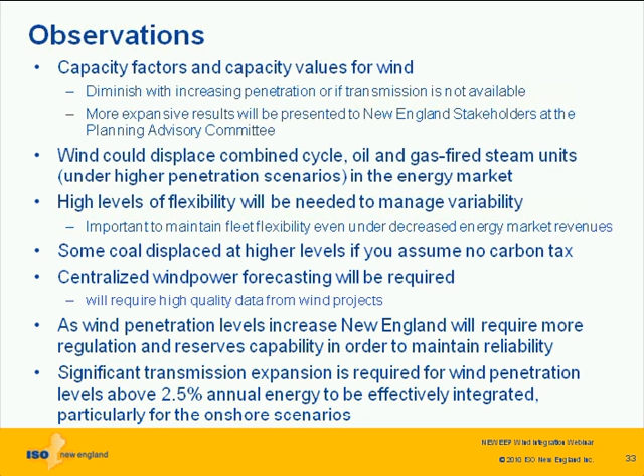As I showed you in those map slides, essentially above levels of what is in the queue, what will we have a high degree of confidence in showing up in the queue? If we get beyond those levels, significant transmission expansion and upgrades will be required in order to effectively integrate those scenarios. I think that's about all I have in my main presentation.

So I think with that, I'll probably turn it back over to Bob. I know I probably hustled through some of those, but I'm trying to help keep us on track on the time so we can have plenty of time for our Q&A.